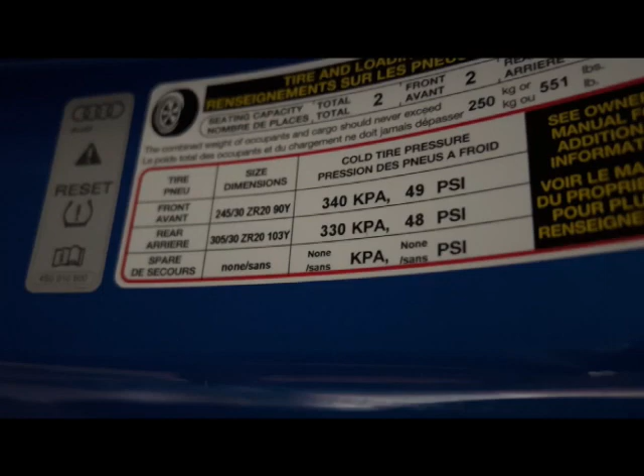So that means you can't put more than 50 PSI in the tire. That is not the recommended tire pressure. Let me show you the second way. Second place to get tire pressure for your car is inside your driver's side door. It's either located on a sticker right here, but on the Audis it's located right here. As you can see, it's got the original manufacturer's tires, and then your PSI is right here.

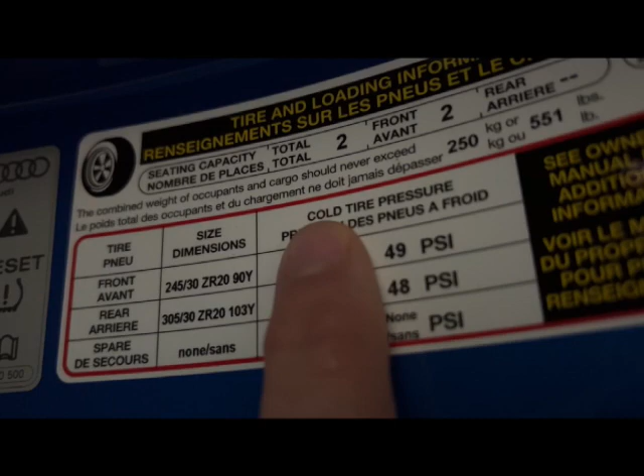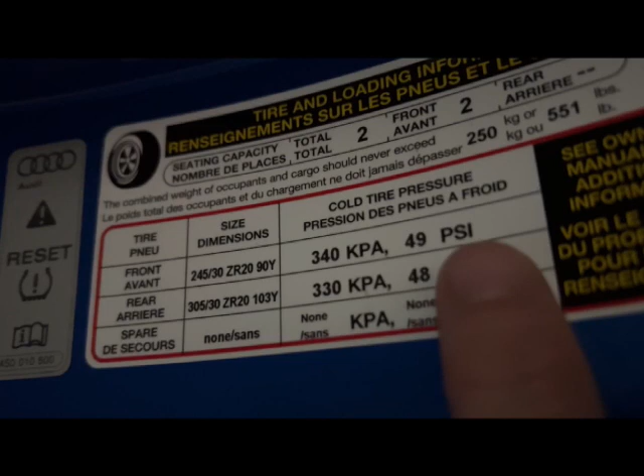This is measured at cold, so normal room temperature, not after you've been driving the car. As you can see right here, it's 49 pounds on the front and 48 pounds on the rear, which is pretty high for our tires in my opinion. With Audi, that's not necessarily the tire pressure that you want.

Let me show you the third place to look for tire pressure. So the R8 had a maximum tire pressure of 50. Recommended tire pressure was 49 and 48, right? Let's see what the book says.

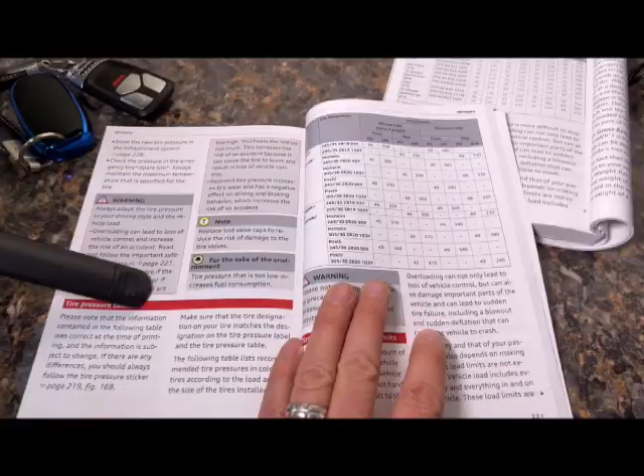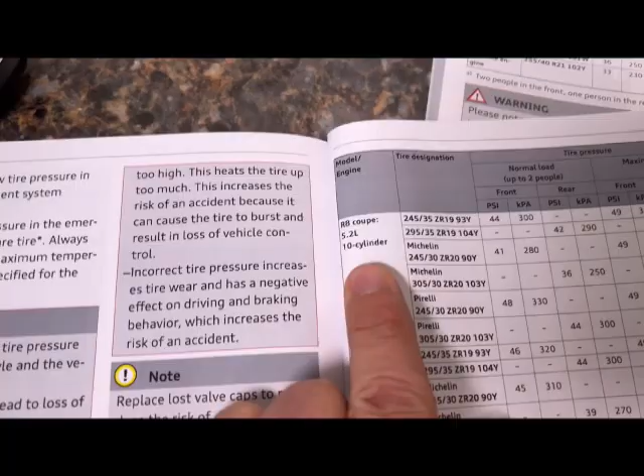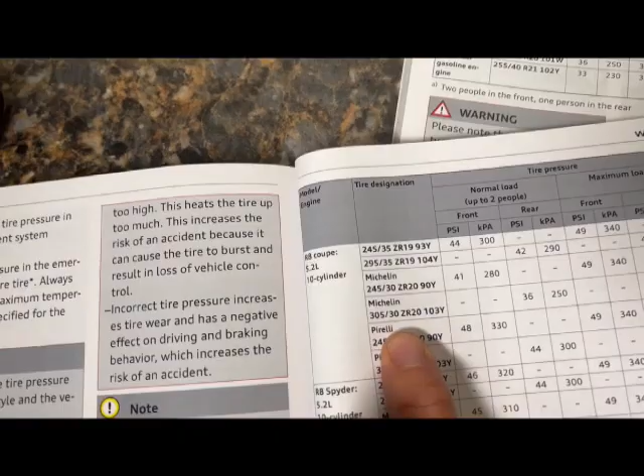I always find this crazy when you find discrepancies like this. On page 221 of the 2021 Audi R8 owner's manual, you find your type of tires, what type of car. I have an R8 Coupe, the other option is an R8 Spyder. You come to the next column and find your tires. I have Michelins, and they are, the front are 245/30 ZR20s, and the rear is a 305/30 ZR20. And if you look across, max load for those tires.

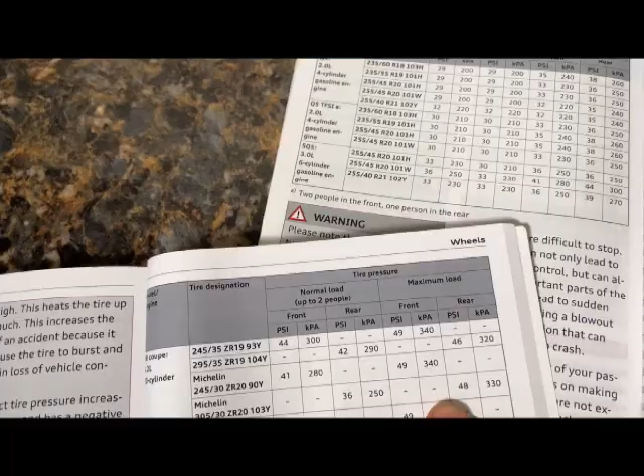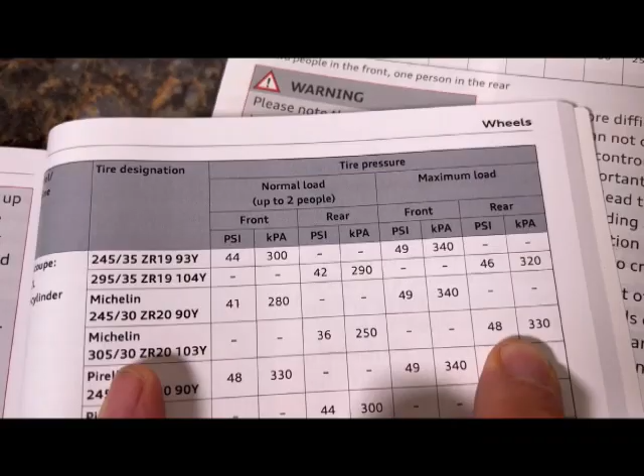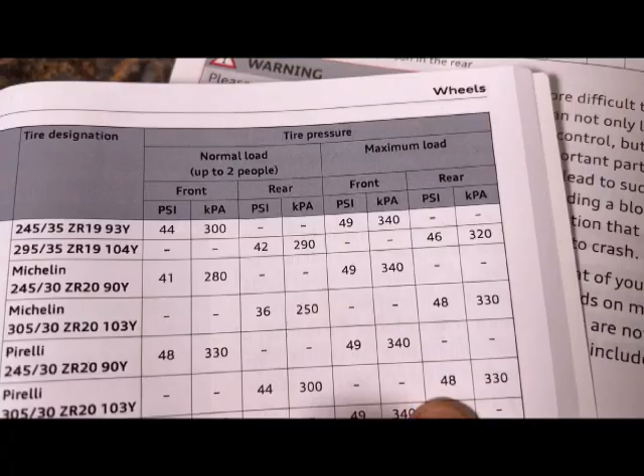See if we got this, this is the rear. As you can see, this is the column for the rear. We go down, and with the Michelin tire, the max pressure for the rear, with the pressure at a maximum load, is 48 pounds. The pressure for the fronts is 49 pounds.

So that equates to the door pressure. I found it on both vehicles. When you put the tire pressures to 49 and 48 on this car, it's all over the road. It's too much tire pressure for the amount of weight on the car if you just have one or two drivers or passengers, not that you can have more, even though it does say up to 2 passengers on the R8.

Rides like crap. Very bumpy, very darty, feels like you have a crappy contact patch. Generally speaking, if you have too much air in the tires, you have a smaller contact patch. You may get a little bit better fuel efficiency, but the handling can be awful because you don't have near the traction you normally have, and you'll get weird wear patterns on the tires because the tire will tend to crown since it's got more air in it.

If you don't have enough air in the tire, then the tire will tend to flatten out on the bottom, and you'll have a larger contact patch. It will grip better, but you'll get worse mileage. And if there's not enough air in it, you'll definitely have quicker wear on the tire. So you want to use the appropriate amount of air in the tire, and I'm going to show you that.

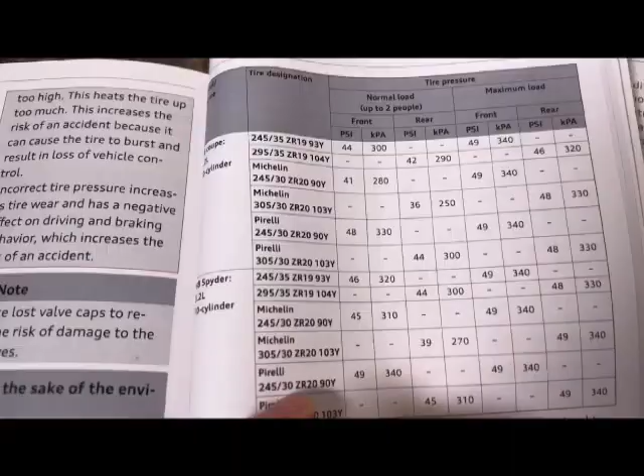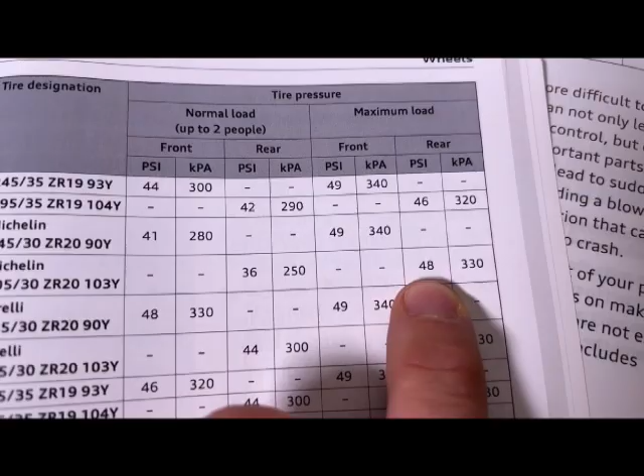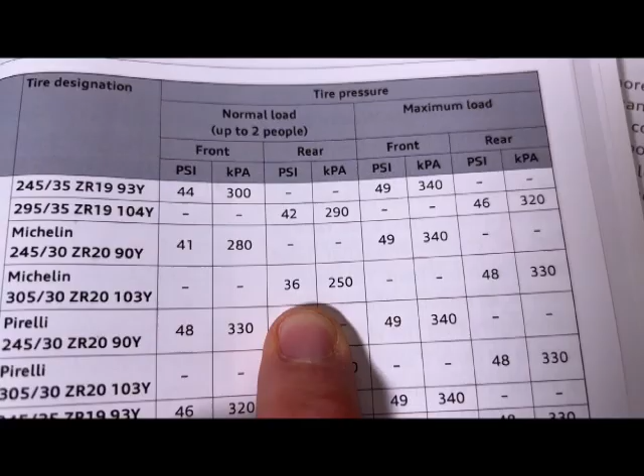Okay, again, Coupe, Michelins, here are the tire sizes. 305s that we've got, the tire rating on the door is 48. With normal load up to 2 people, the actual appropriate tire pressure is 36. So that is a huge difference, that's 12 pounds difference.

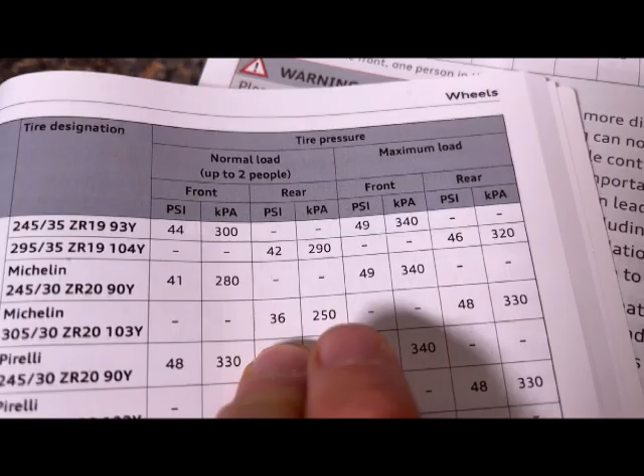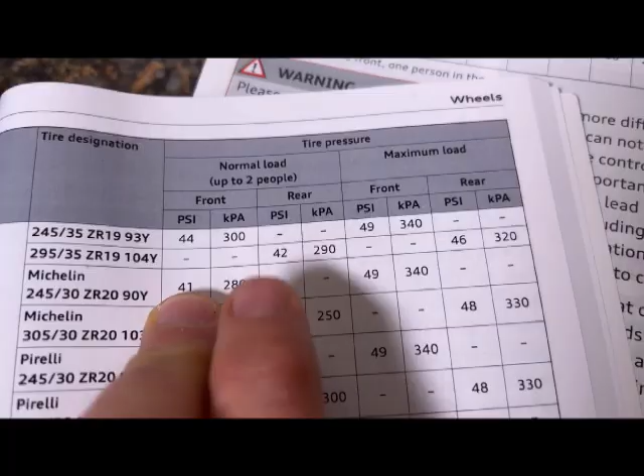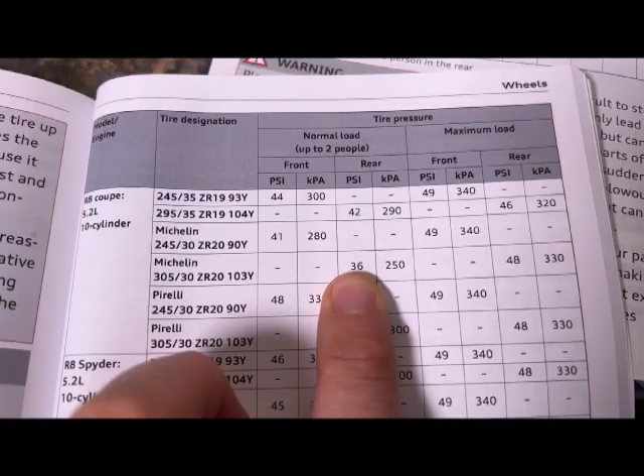It's 3/4 of what the tire pressure is according to the rating plate. And if you look at the other tire, it is 41 pounds on a normal load up to 2 people. So just to clarify, with these Michelin tires, on the rear you put 36 pounds when the car is cold, the tires are cold, and 41 pounds on the front.

It's a big difference in tire pressure, and it made a big difference in how the car handled. I went ahead and filled it up to the 49 and 48, rode like crap, took it down to the 36 and 41, and it's back to that amazing driving machine that you know as the R8 V10.

So that's the R8. Looking at the Audi SQ5, which yes, it's dirty, we've been driving in the snow. And these tires suck in the snow, regardless. Again, the maximum tire pressure on these tires is 50. Actually, it's 51 PSI.